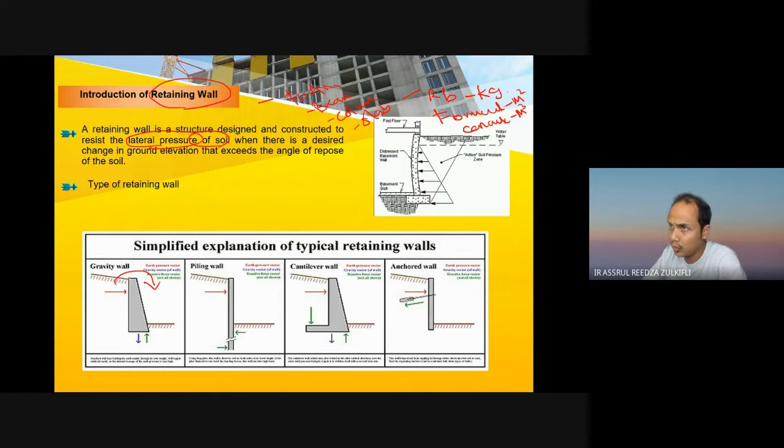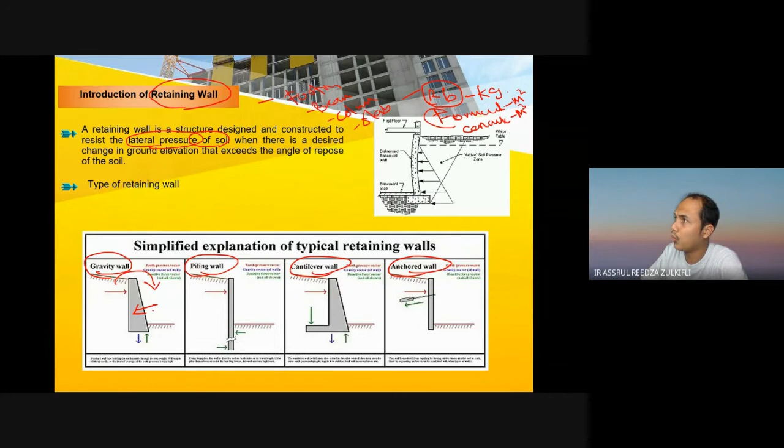For example, if it's mass concrete, it's purely mass concrete. Sometimes they use reinforced concrete, then you have to find the quantity for reinforcement bar, for formwork, and then for concreting.

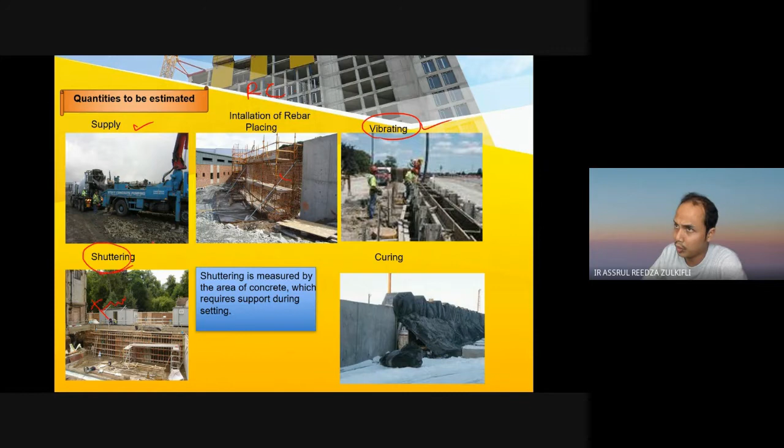So this is the works to be done for ordinary concrete works, including works for retaining wall. If the retaining wall uses reinforced concrete structure, you need to supply the concrete, vibrate the concrete, install the reinforcement bar, do the formwork by the process of shuttering, and then do the curing process.

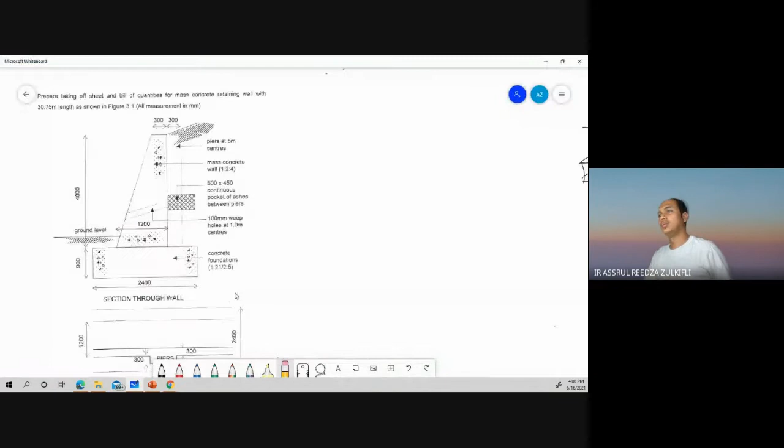Okay, so just to see what is called retaining wall, how the retaining wall is designed. Actually it depends on the design, on the drawing you get prior to doing the taking off. Okay, let's say this is your design of retaining wall, given in the form of a typical section of retaining wall like this.

Okay, prepare a taking off and bill of quantity for mass concrete wall, mass concrete retaining wall. Mass concrete means it doesn't have reinforcement bar.

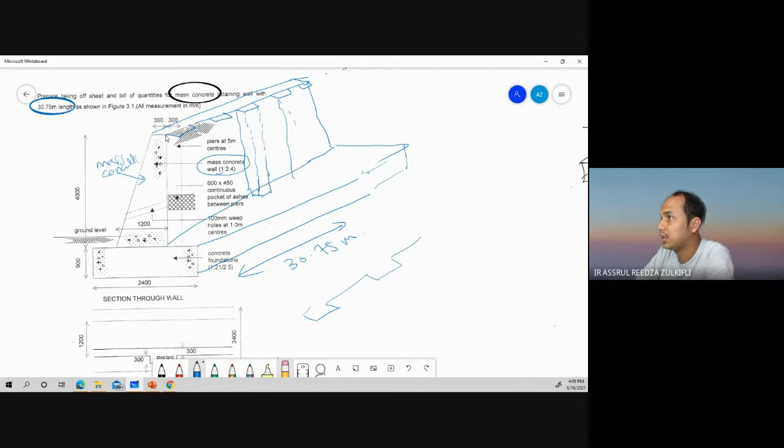Dia at center, kita assume center to center lah, sepanjang 30 meter ni. Okay, so that is the component yang kita boleh baca daripada this drawing. So what are the other components?

Dia kata weep hole kan. Selalunya dia yang bermain dengan tanah ni, you need to provide an opening, maksudnya a weep hole. So apabila hujan berlaku, dia akan keluar air dekat dalam weep hole ni. And dia letak at 1 meter center.

At 1 meter center, kita assume dia 1 meter, every 1 meter. Every 1 meter kita letak satu pipe dekat tengah ni, sepanjang 30 meter of retaining wall ni.

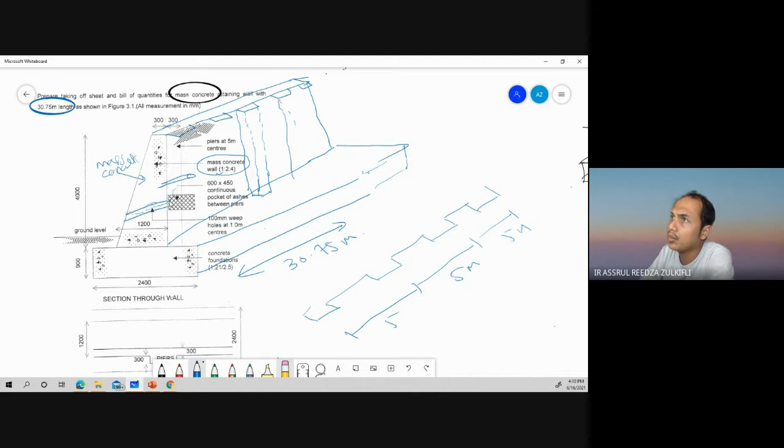Okay so what else? And then dia letak lagi in between the pier ni, dia letak satu, orang kata dia panggil a pocket of ashes. Ni one of another component of retaining wall, a pocket of ashes. So you just follow je benda ni.

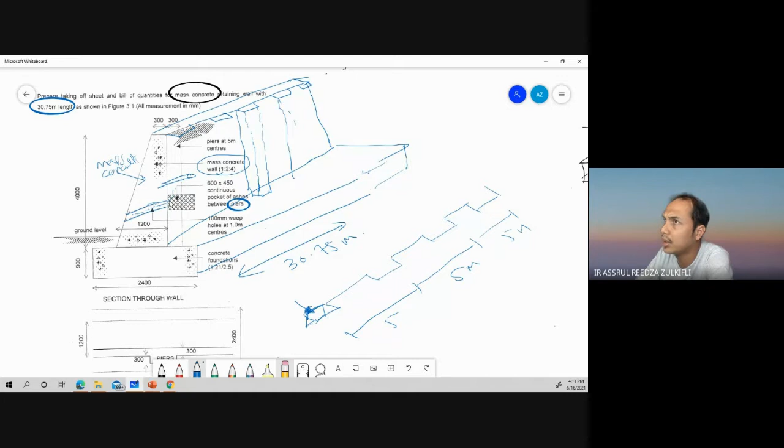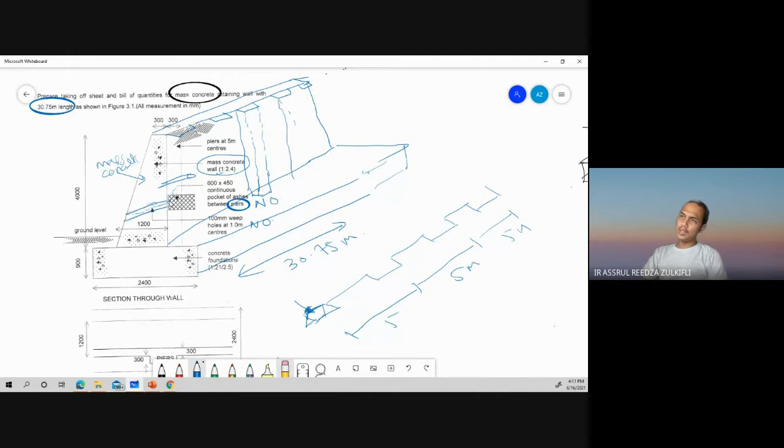Okay, a pocket of ashes maksudnya berapa banyak nak di-install ni, dia kena letak dalam unit numbers. Ni you dapat dalam unit numbers, weep hole pun you dapat dalam unit numbers. Okay, so bila you tengok ni, you dah boleh baca drawing, and barulah you start buat taking off.

Okay, so macam mana nak buat taking off? Okay, so first you need to identify, katakan you nak cari dia punya formwork dulu, formwork untuk membentuk this retaining wall ni dulu, formwork.

Okay, ni dia panggil toe kan, dekat bawah ni. Okay, toe formwork. So toe formwork dia, dia dah bagi dia punya dimension, simple dimension 2.4 dan ni 2.4 kali dengan ni 0.9.

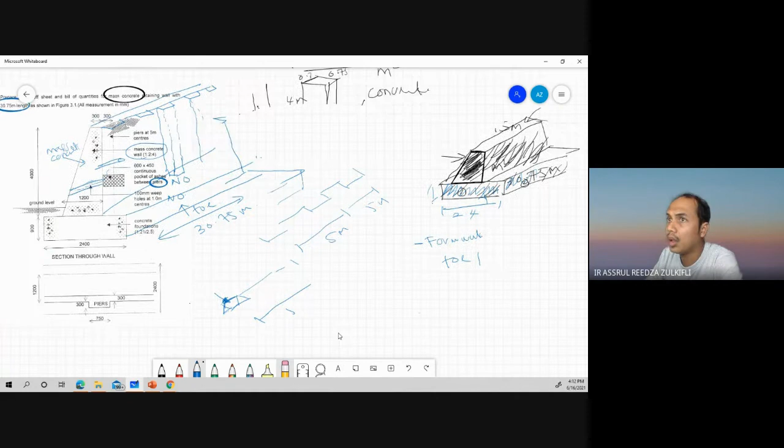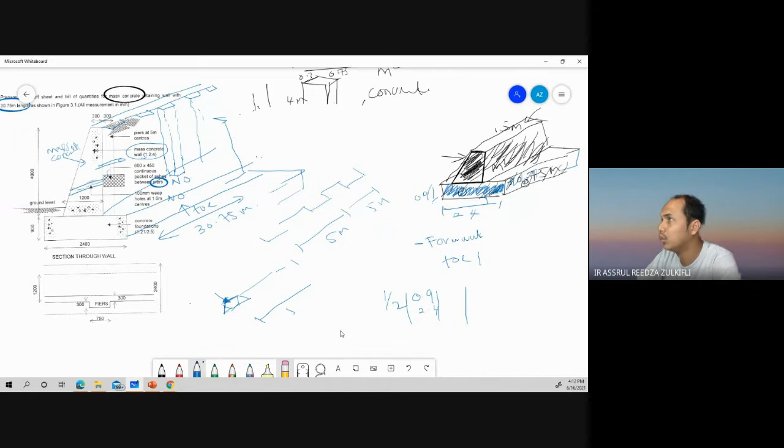Okay, so you cari formwork sebelah sini, you cari formwork sebelah belakang ni, so you buatlah dalam you punya taking off sheet. Okay, ni satu je. Katakan side formwork ni 0.9 kali dengan 2.4 kali dengan 2 side. Okay, so you dapat dalam meter square.

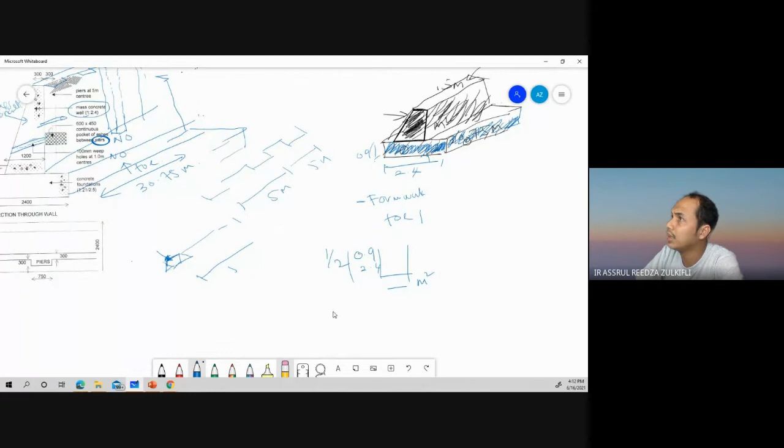And next, sebelah sini pula, dengan sebelah sini. Panjang dia ialah 30.75 kan, darab dengan 0.9 darab 30.75. So ada dua side juga, dua side. So the square. Ini tulis kat sini, toe formwork.

Kaki formwork untuk retaining wall ni, kan? Kaki formwork untuk retaining wall ni. Okay, and then barulah you pergi ke atas ni pula. Barulah you pergi ke atas ni. You buat elok lah.

Okay, so untuk main retaining wall, kan? Main retaining wall, you punya apa formwork you, formwork sebelah sini, you dapatlah 1/2 kali dengan ni berapa ni? Tengok dia punya dimension. So you cari dia punya luas lah. Dia punya luas ni berapa?

Kan you boleh dapat kan ni 1.2, ni 1.2, ini 0.3. Kan? So macam you mencari luas kat sini. Okay, kali dengan tinggi berapa tinggi? Tinggi 4 meter, 4 meter.

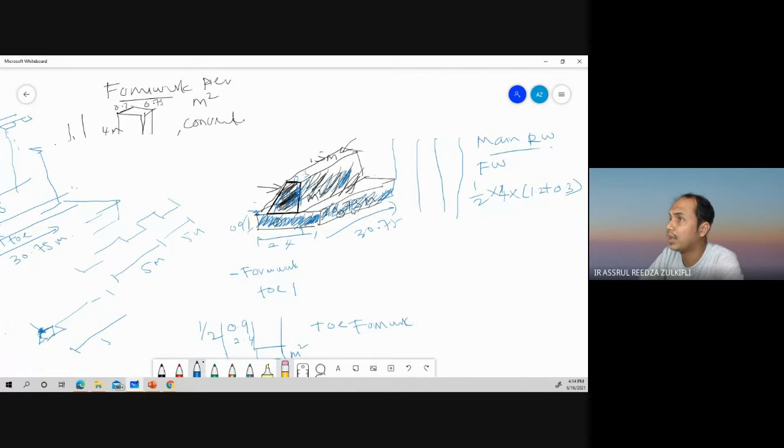Luas trapezium kali dengan 1.2 tambah dengan 0.3. So dapat bahagian sini and then multiply by 2, sebab ada 2 side sebelah sini.

And then sebelah sini pula, okay, just 30.75 kali dengan 4 meter. And then sebelah sini, you boleh dapatkan luas panjang sendeng ni. Dengan menggunakan teorem Pythagoras, so dapat panjang ni, and then multiply by 30.75. So you dapat keseluruhan formwork untuk membentuk this retaining wall.

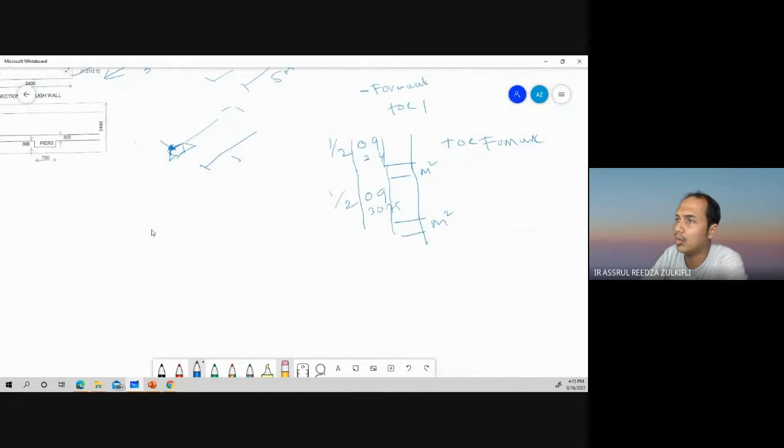Okay, and then sama juga dengan you nak cari pier ni. Pier ni pula dalam bentuk macam satu kolom every 5 meter. So every 5 meter dia akan letakkan dia punya pier ni, sepanjang 30 meter. Maksudnya dia ada dekat sini lah, somewhere here. Okay, so dia punya tinggi dia still 4 meter.

So you buatlah cari formwork kat sini pula. Cari bahagian sini dengan bahagian sini, and then multiply by how many pier yang nak di-install ni. You buat dalam bentuk taking off juga, simple formwork. And then barulah you kira dia punya konkrit.

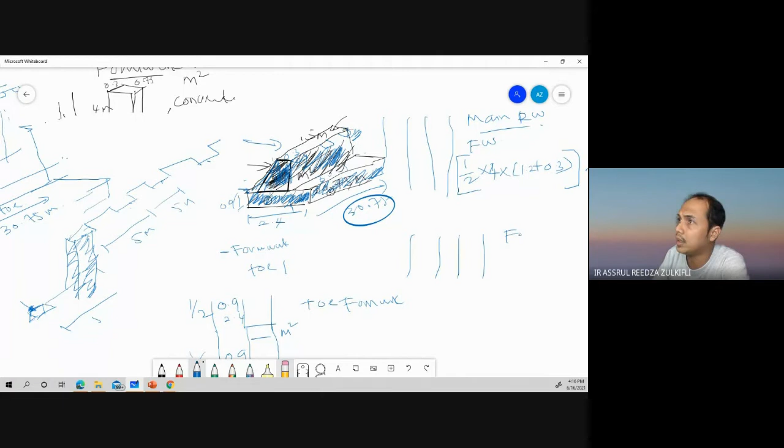Konkrit untuk pier, and simple. Okay, dia punya kelebaran dia ialah 0.75 kali dengan 300, 0.3. Okay, konkrit dia, formwork you kira sendiri.

0.75 kali dengan 0.3 kali dengan panjang dia 4 meter, and then multiply by how many pier. Macam mana nak dapat how many pier? 30.75 divide by 5 meter. Every 5 meter dia akan letak satu pier. So berapa you dapat? Lebih kurang 6 lah, you dapat 6 batang pier sepanjang 30 meter ni.

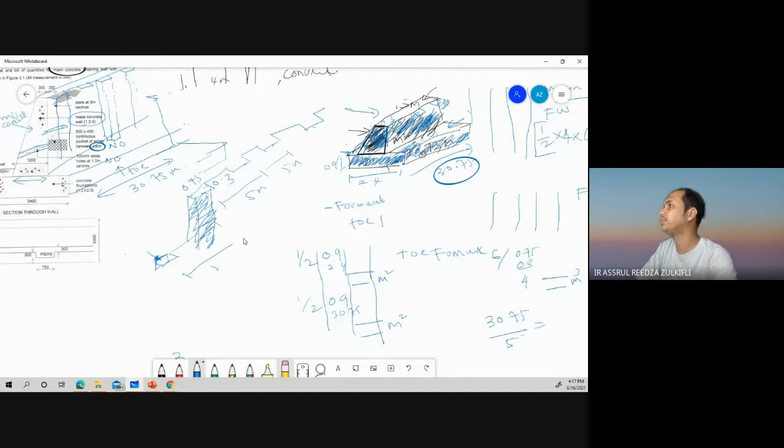So you multiply, you dapat dalam unit meter cube. Okay, and then cari pula concrete toe, how many volume cubic meter of concrete toe, how many main retaining wall ni, how many meter cube of main retaining wall just in mass concrete. Macam mana nak dapat luas ni? Luas yang you dapat ni multiply by length, multiply by dia punya length. So dapatlah dia punya volume.

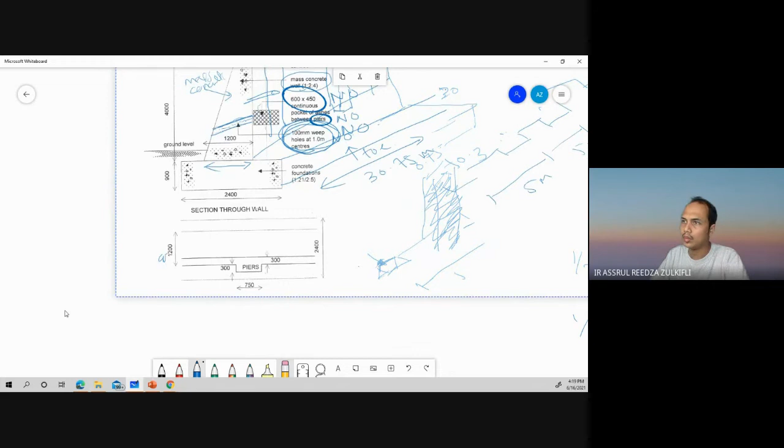Floor. Okay, you choose here mass concrete. Mass concrete. Wall, mass concrete wall. And mass concrete wall. How much is the quantity? 1, 2, 4. Unit is in meter cube - the quantity you calculated earlier. Mass concrete wall for this part.

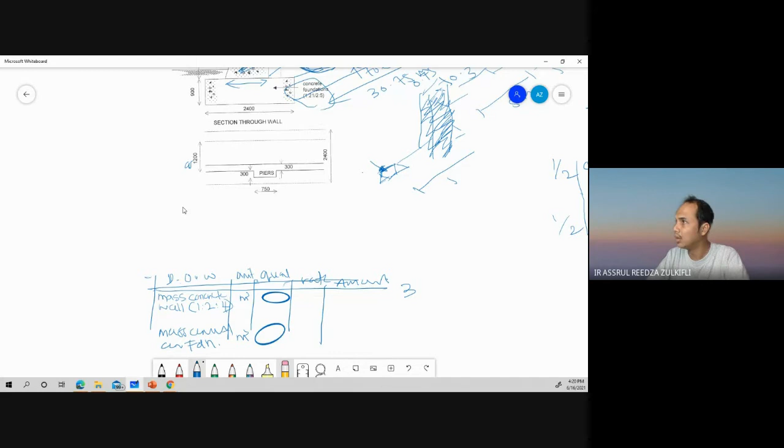Okay, and then next is the pier. And for pier, this is mass concrete. And then the formwork. Formwork, how many meter square. Formwork for mass concrete, how many meter square. Formwork for foundation, mass concrete foundation. Okay, mass concrete wall.

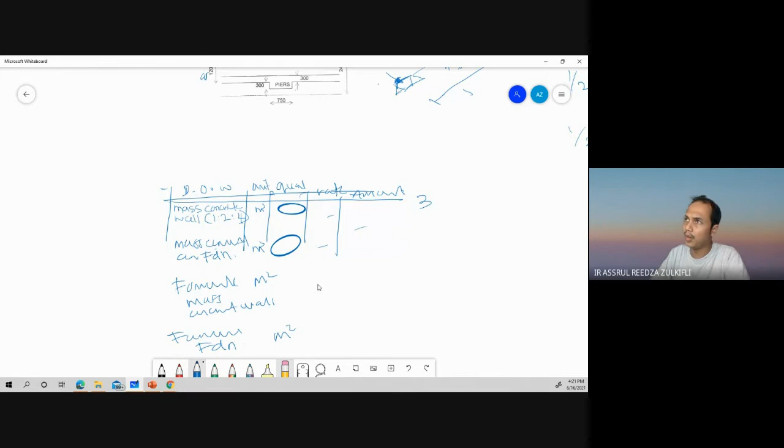Okay, so you will write it back in the form of BQ. And formwork for foundation, in meter square. And after getting foundation, then you put all the components. For example weep hole - weep hole, 100mm diameter of weep hole, unit in numbers. How many numbers? 30 numbers.

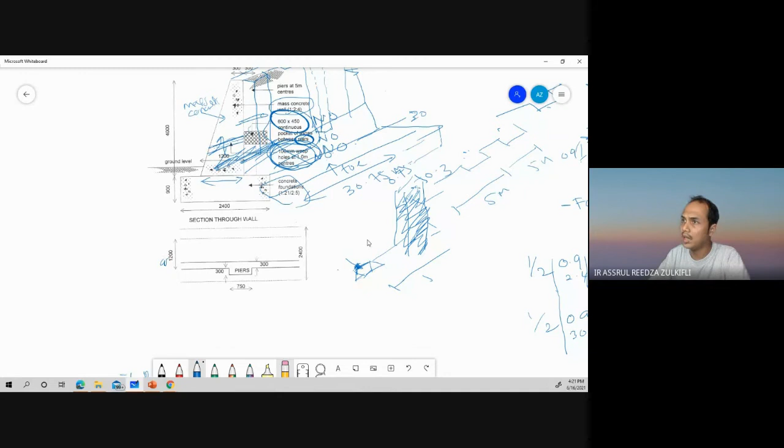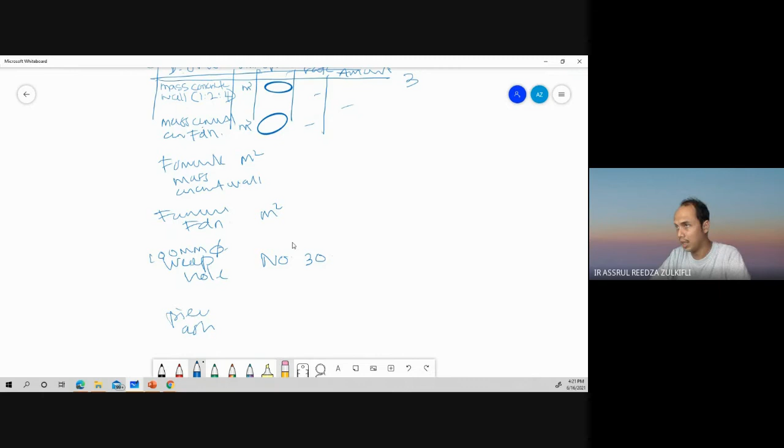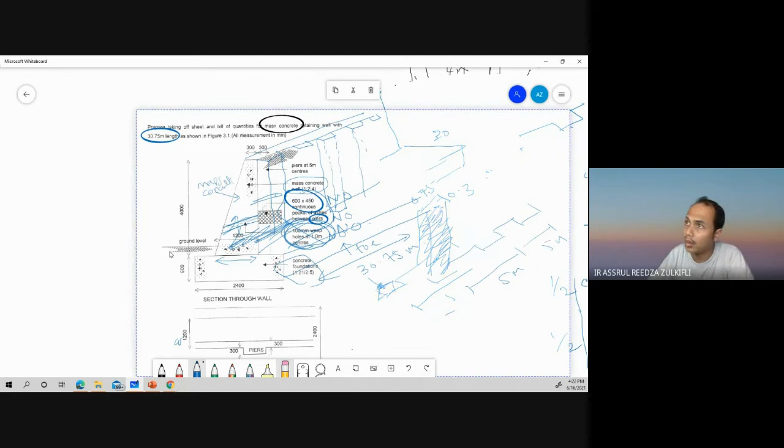Okay, and then you do the pier - how many meter cube of pier, how many meter square of formwork for pier, and so on. That's how you do the taking off and also the process of preparing the BQ on the spot.

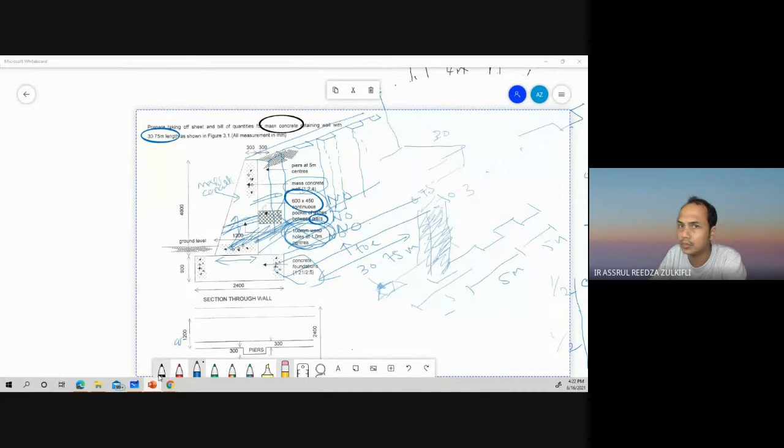Okay, so whatever you notice depends on your understanding of the drawing itself. If you understand the drawing, you can answer well. You understand how the work is to be carried out. For reinforcement work, for concrete work, it doesn't stray far - you need to calculate foundation, you need to calculate formwork, reinforcement bar if there is reinforcement bar, if not go straight to concrete, and after concrete that's it. That is the main component in any kind of work.